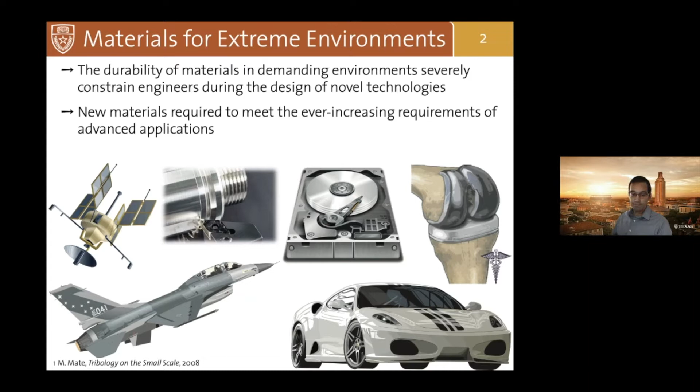If you think about other kinds of aerospace satellites, you see that it's not only the temperature that has to go from very low values to very high values, but also the extreme environmental conditions that these components are exposed to vary widely in space—for example, from ultra vacuum to oxidizing environments, as well as moving components.

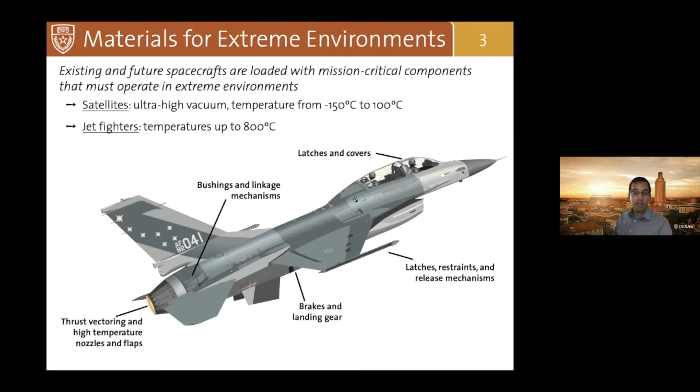A lot of the components highlighted here do have surfaces that are in relative motion, meaning they're sliding against each other. That's exactly one of the interests of my research group, which is tribology. For those of you who are not familiar with the word, tribology is the science and technology of interacting surfaces in relative motion and associated subjects, mainly friction, wear, and lubrication.

When two bodies come into contact at the macro scale, contact occurs at the level of single asperities. These asperities have the dimension of a few microns or even a few nanometers squared. The usual way I introduce this to my students is by thinking about putting Austria upside down on top of Switzerland—of course, you have mountains coming into contact because of surface roughness.

And it is exactly at the level of these single asperities that fundamental phenomena occur, including plasticity, elastic deformation, fracture events, and the conditions are so extreme in terms of temperature and out-of-equilibrium conditions that you can also trigger chemical reactions. In other words, tribological surfaces and interfaces involve a complex interaction between chemistry, physics, and mechanics. I will get back to the importance of studying these nanoscale features later on in my talk.

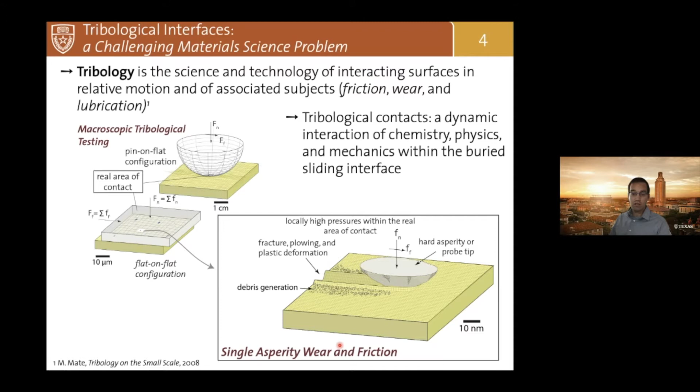Why do we care about tribology? Tribology has a profound impact on our economy, lifestyles, and environment.

More than 10% of the world's energy produced is wasted overcoming friction and replacing worn-out components. For example, the economic losses due to friction, wear, and replacement of worn-out components is around 4% of the gross domestic product, so $740 billion in the US.

To be even more concrete, around one-third of the fuel energy put into our cars is wasted just to allow your car to move. That means every one of you who owns a car is wasting something like $300 per year just to allow your car to move. So tribology has a direct economic impact overall, but also in our everyday life.

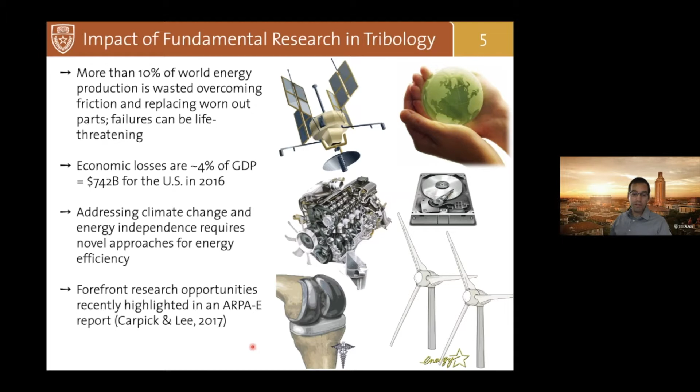But it's not only economic, it's also environmental, as well as, I'll touch upon later in this talk, healthcare. More recently, there was a report to ARPA-E by Carpick and Lee that highlighted the importance of fundamental and applied research in tribology to address this important global challenge.

Our approach, though, is not the traditional approach used in material science and tribology, where you have a systematic parametric study of the relationship between material synthesis and functional behavior. Rather, we want to establish synthesis-structure-properties-functional behavior relationships, meaning we want to establish the knowledge necessary for rationally designing materials.

We want to address that problem by using advanced surface analytical methods and in situ approaches to investigate in real time what happens when surfaces are in contact and sliding against each other.

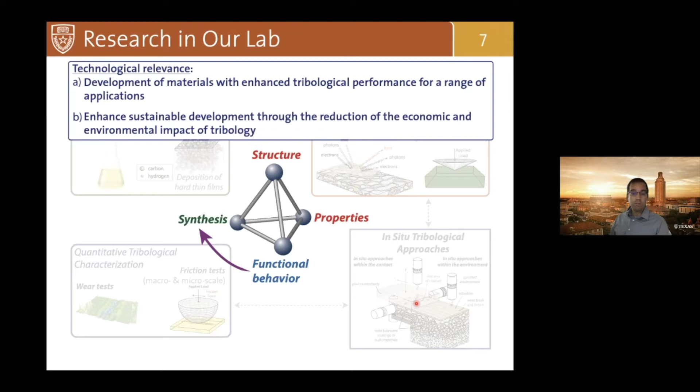This, of course, can lead to novel technology across different sectors and different length scales, from the micrometer, nanometer length scale to the meter length scale. I'll get back to this at the end of this talk.

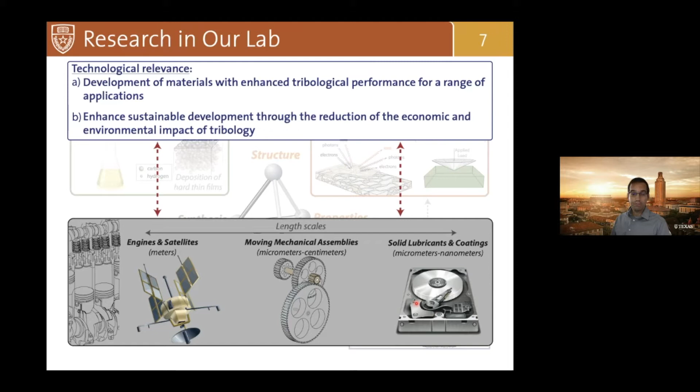The research projects we are working on in my lab can be divided into four main categories. The first one is liquid lubricants. I'm trying to understand the molecular origins responsible for the tribological response of lubricants that are used in engines, but also potentially in aerospace applications.

Thin films, again mainly for aerospace applications but also microelectronics, bulk materials, and finally a project on tribocorrosion for healthcare. Today I will mainly focus on liquid lubricants, but I'll also mention ongoing research on thin films and tribocorrosion. Let me start with the first topic.

As you might know, our engines, internal combustion engines, rely on a hydrocarbon fluid to enhance lubrication of moving components. This lubricating fluid consists of hydrocarbon base oil and an additive package.

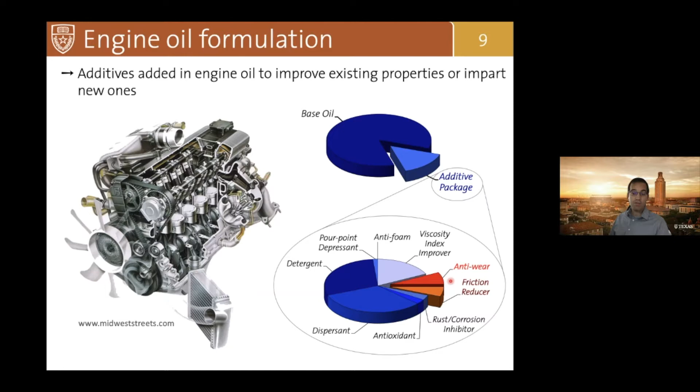The additive package consists of several molecules, each with a specific function. Among them, we are interested in investigating anti-wear and friction-reducing molecules that, as the name says, reduce friction, enhancing the energy efficiency of the internal combustion engine and preventing damage to components sliding against each other.

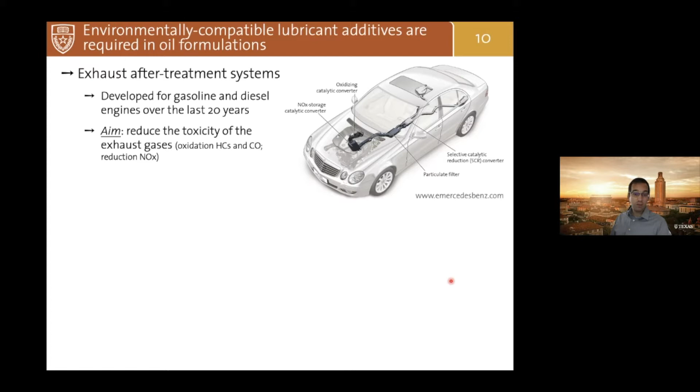What is the problem? In the last 20 years or so, exhaust after-treatment systems have been introduced to reduce the toxicity of exhaust gases. However, these catalysts are easily poisoned through deposits on the catalyst material by byproducts of components usually found in engine oils, in particular molecules containing high levels of phosphorus, sulfur, and metal ions.

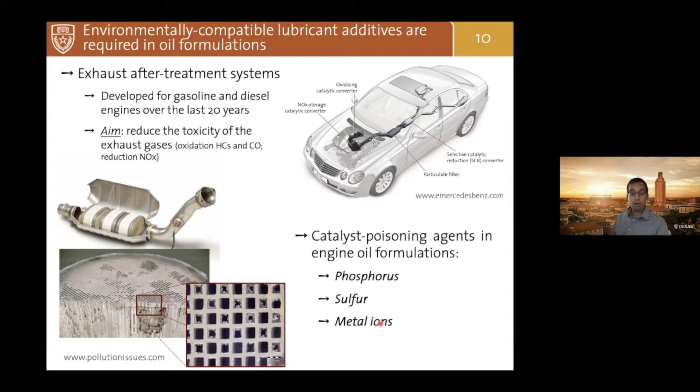Because of this problem, international legislations are trying to reduce the amount of phosphorus, sulfur, and metal ions in engine oils, and they are also pushing towards molecules that are highly thermally stable.

One of the potential additives that has been quite widely investigated recently is a family of liquids called ionic liquids. These are liquids or salts that have melting temperatures below 100 Celsius, composed of an organic cation and a weakly coordinating anion. They have unique properties such as high thermal stability, negligible vapor pressure.

and good ionic conductivity, which make them attractive for a number of applications, from green solvents to separation media, as well as working fluids, for example in lubrication.

They have been shown to lubricate even difficult to lubricate materials such as silicon and light alloys. They are, of course, a candidate material for engine oils, but also for aerospace applications, given the low vapor pressure.

One of the problems is that there are 10 to the 18 ionic liquids available due to the number of permutations between anions and cations. Of course, I can try to have 10 to the 18 graduate students, but probably that would not be the most efficient way to address this problem.

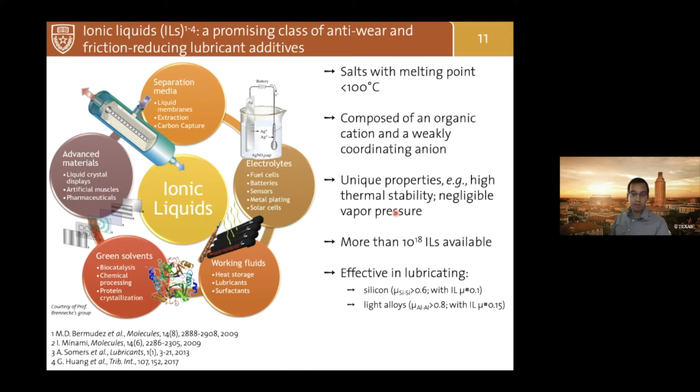So what we are trying to do is understand the underpinning mechanism by which ionic liquids can lubricate materials. So what is known? If you take a very rudimentary picture of what's happening when macroscopic bodies come into contact and slide, because of surface roughness, you have these asperities that come into contact. And this is exactly where a lot of the interesting things happen.

So what happens when you put this nanometer scale single asperity into contact in the presence of the ionic liquid? This is a very simple problem you might think about, but is actually very complicated and challenging to address. A lot of people use nanoscale devices, such as the surface force apparatus and the atomic force microscope, to squeeze the ionic liquid between the surfaces, trying to understand what happens between the ionic liquid when they are confined between these two solid surfaces.

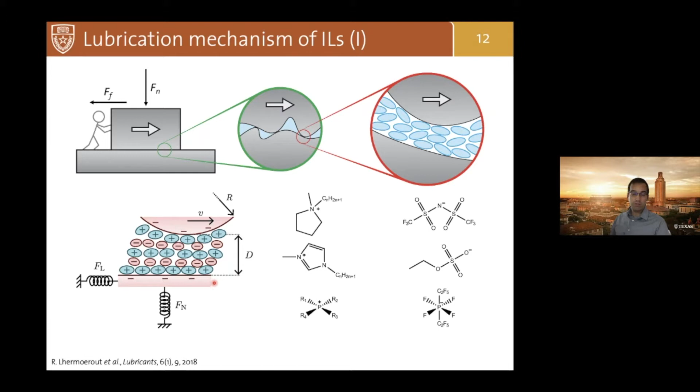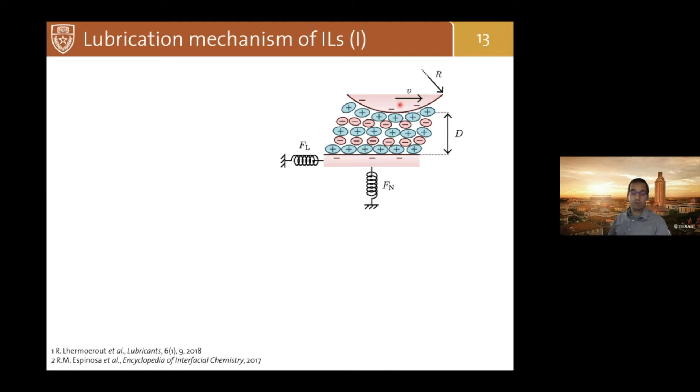So published literature shows that when you have velocity equal to 0, meaning that they are static, you're just compressing the two surfaces and confining the ionic liquid, you have what is called progressive squeezing out of the ionic liquid. Here you see the force experienced by the surface when they come into contact with the reference surface, the bottom one, as a function of separation d.

And what you see is exactly some fluctuations. These fluctuations, or discrete steps, correspond to the squeezing out of ionic liquid during the progressive decrease of the separation between the two surfaces. So in other words, the ionic liquid organizes itself in layers where you have an excess of cations and an excess of anions. And when you're decreasing the separation, you're progressively squeezing out slabs, electroneutral slabs, so you're removing anions and cations at the same time. And because of this squeezing out, you have these progressive, discrete steps in the force separation curve.

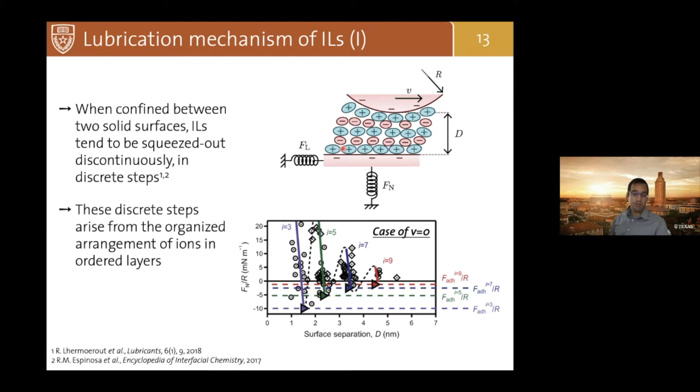Because of this squeezing out, or because of this rearrangement, people have basically proposed that this arrangement of the ionic liquid during the compression and confinement actually results in the lubricity of the ionic liquid.

However, at the macro scale, a group led by Jun Qu from Oak Ridge National Lab clearly showed a while ago that ionic liquids actually react on surfaces, so a completely different mechanism. They create these layers, which you see on top of this steel. At the bottom here you have steel, and then you have this tribofilm boundary film.

And what researchers from Oak Ridge showed is that in the case of this phosphonium phosphate ionic liquid, you have the formation of this phosphate-rich layer that actually prevents wear and leads to low friction in macro scale tribological experiments. So clearly here we have a length scale problem. So at the nanoscale we have some information, and at the macro scale we have some other mechanism coming into play.

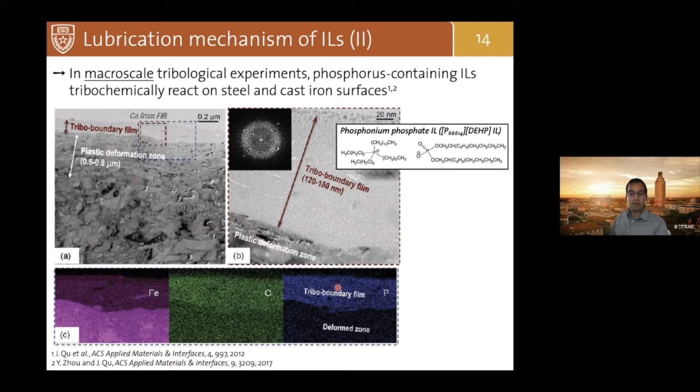So that's exactly what we wanted to do to start with in my lab. What happens really when you're applying very high pressure at the nanoscale with the phosphonium phosphate ionic liquid? What is the underpinning lubrication mechanism of ionic liquid, and can we understand at the nanoscale what happens to the ionic liquid itself when it is squeezed at very high pressure?

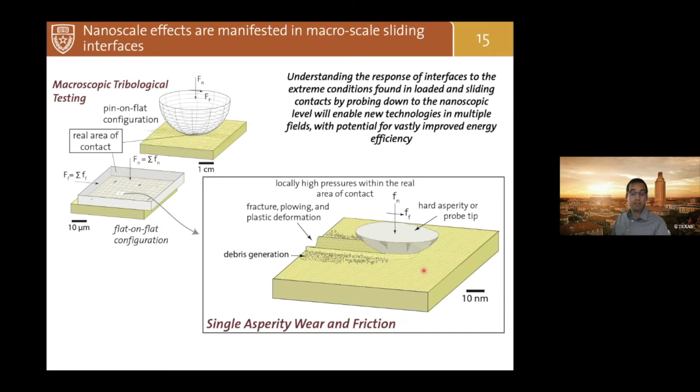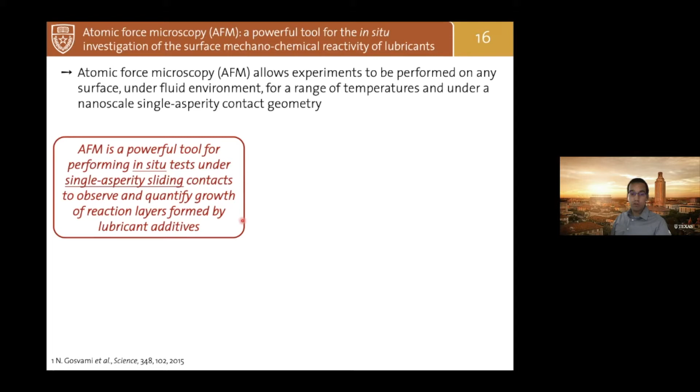How do we do it? We use, as I said, in my group, state-of-the-art analytical methods, and in particular, in this case, atomic force microscopy. Why? Because atomic force microscopy allows us to perform in situ tests in single asperity sliding contacts.

For those of you who are not familiar with AFM, AFM uses a flexible cantilever, at the end of which you have a very sharp tip, that are pushed together, and you can achieve extremely high load and pressure in the presence of the ionic liquid.

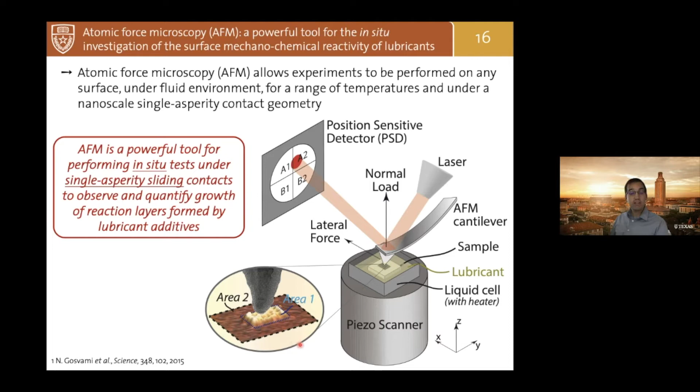This would allow us to show, understand, and visualize what happens at the contact in real time, while knowing basically the shape of the tip, meaning the pressure, to have an accurate measurement of the pressure.

The test that I'm going to talk about, again in the case of phosphonium phosphate ionic liquid, which is a well-known ionic liquid pioneered by researchers at Oak Ridge, we basically perform high pressure, very high pressure, the highest we can go with AFM, in this dark red region. And every now and then we zoom out and we visualize what happens in this small area down here.

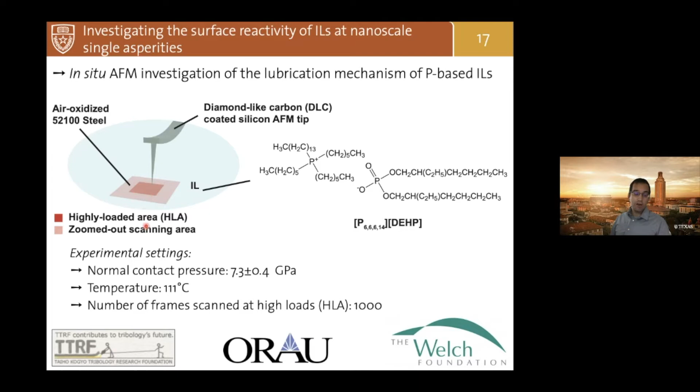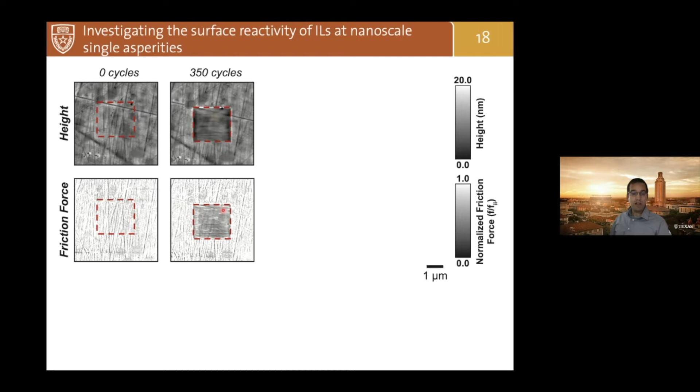What you see is an area slightly darker, meaning slightly lower height—in other words, we are removing material. At the same time, we see a darker region in the friction force, meaning we are decreasing the friction force measured by AFM.

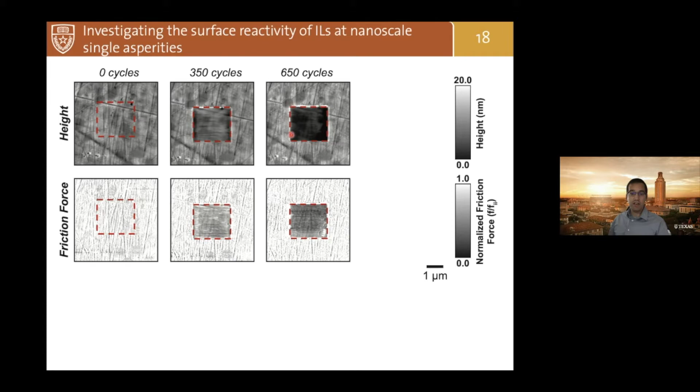We can increase the cycles in the inner part of this image where we apply very high load, performing 650 cycles inside this dashed red area. Again, we are removing more and more material. So there is a progressive removal of material, and at the same time a decrease in friction.

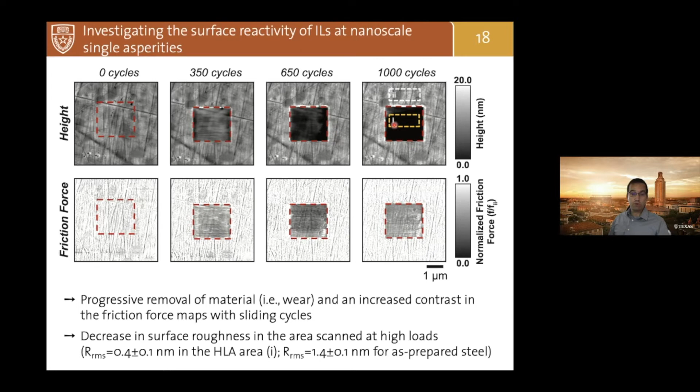The area scanned at high load was actually getting much smoother, as measured by RMS roughness. So we tried to quantify this by computing the height difference between the area scanned at high loads and the reference area that was not scanned at high load.

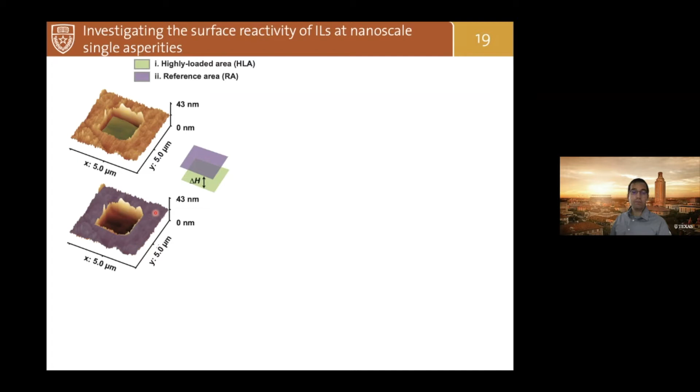We also computed the change in friction by looking at the friction force distribution and computing the difference between the distribution in the region loaded at maximum load and the reference area.

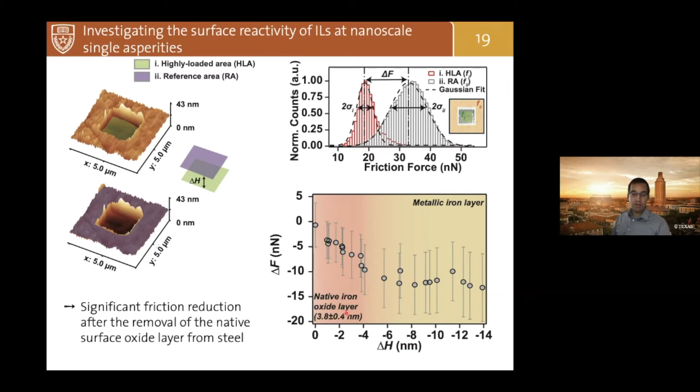The key result is in this plot at the bottom right, where you see the change in friction as a function of change in height. There is a slight progressive decrease in friction until you remove the first 4 nanometers of the surface. This value was comparable to the native oxide layer on steel, meaning that once we go through the steel oxide, we achieve a low friction steady state regime.

So what is the origin of this? As a surface chemist, I'm always interested in spectra, and in understanding the underlying surface chemical origin of friction changes.

To address this problem, we have to use a national facility, the National Synchrotron Light Source. It's basically taking a sample that is 1 square centimeter and finding a spot on the order of 10 to the minus 8 centimeters squared.

My student very patiently traveled thousands of miles and was able to see a 2 by 2 micron region over a 1 centimeter square sample in a very effective way, in just a few days at the synchrotron.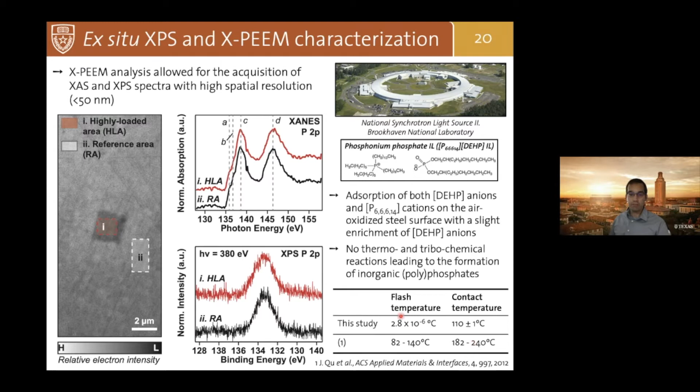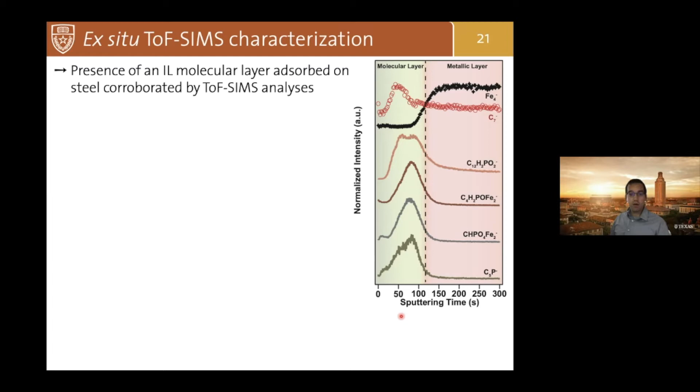Being surface analysis people, we were also interested to look at the molecular fragments in these boundary layers. What we show is that in the region under stress at very high loads, we have an enrichment of the anion, the phosphate, while we don't have an enrichment of the cations, or a small enrichment probably.

All these changes were also correlated to changes in surface potential that we measure by low energy electron microscopy. This technique measures the surface potential by looking at the intensity of reflected electrons as a function of electron energy. The inflection point is a clear indication of where the surface potential of our sample is.

We could put all this together thanks to density functional theory calculations, which were done by looking at the adsorption of phosphate ions on iron, metallic iron and iron oxide. Of course, there is a change in enthalpy of adsorption, but the key point is that phosphate on metallic iron interacts through multi-point interaction of oxygen atoms with iron, whereas phosphate only binds through a monodentate interaction, meaning only through one oxygen atom, on iron oxide.

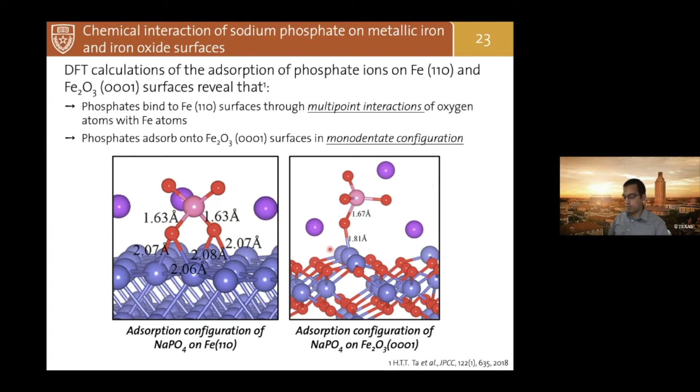Based on our results and the DFT calculations reported in the literature, we came up with these proposed models where we have mainly phosphate adsorption on iron oxide. As the scanning tip slides at high pressure, we start organizing the ions through lateral confinement, something I'm not going to talk about today.

If we slide at extremely high loads, we go through the oxide, which results in a difference in the way the phosphate ions bind to the surface. In the case of iron oxide, you have only monodentate configuration, whereas in the case of metallic iron, you have bidentate configuration. Thanks to the surface being extremely smooth and the lateral confinement of the AFM tip, the ions maximize the interaction energy, reduce the configurational entropy, and form this densely packed boundary layer that is helpful in reducing friction.

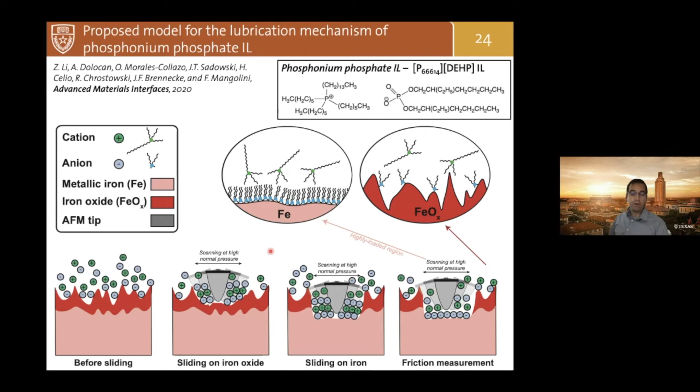So again, in this work, we show how you can combine in situ AFM and advanced spectroscopy to understand the mechanism of action of ionic liquids and how they can lubricate surfaces.

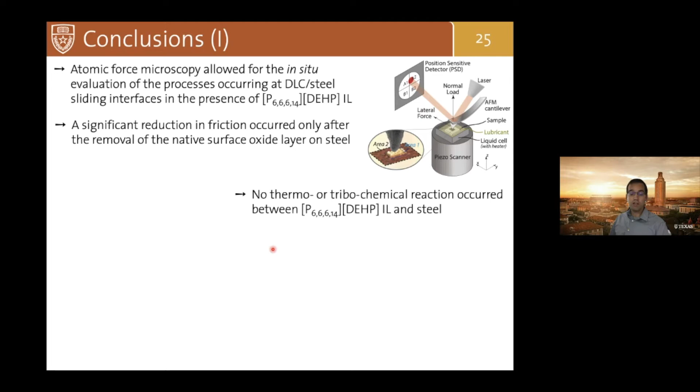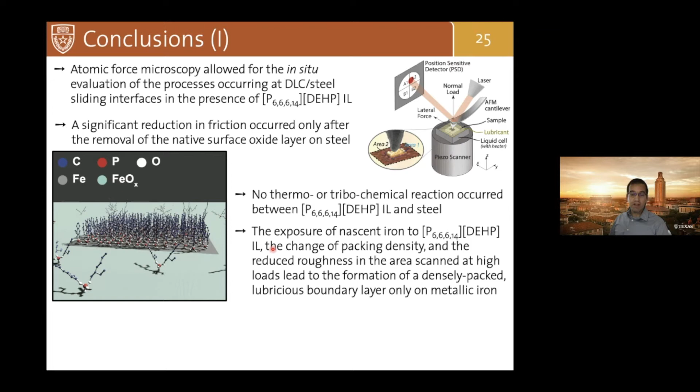Again, atomic force microscopy can be used to evaluate the processes occurring at steel surfaces. I showed that there is a significant reduction in friction after you remove the steel oxide layer. There is no stress-assisted chemical reaction, so there is no real inorganic boundary layer formed here. But we have the formation of a densely packed surface layer made mainly of phosphate ions once you remove the oxide layer.

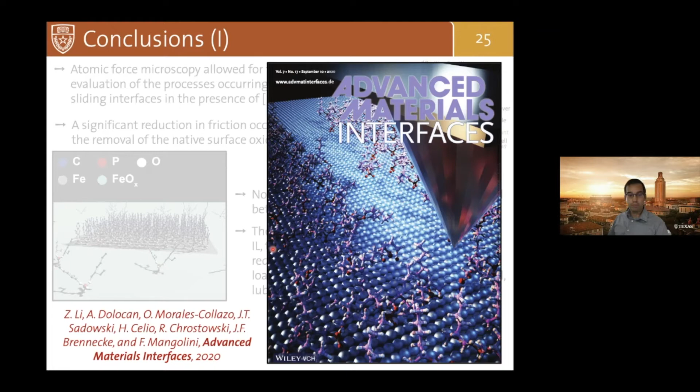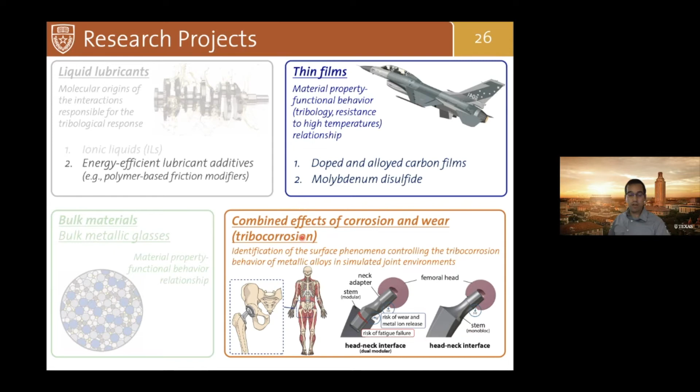So very briefly, in the last 5 to 10 minutes, I'm going to touch upon a couple of projects. One is about doped carbon materials, and the second one about tribocorrosion. This work was a collaborative effort between University of Pennsylvania, École Centrale de Lyon, University of North Texas, and University of Florida, with a contribution from NASA.

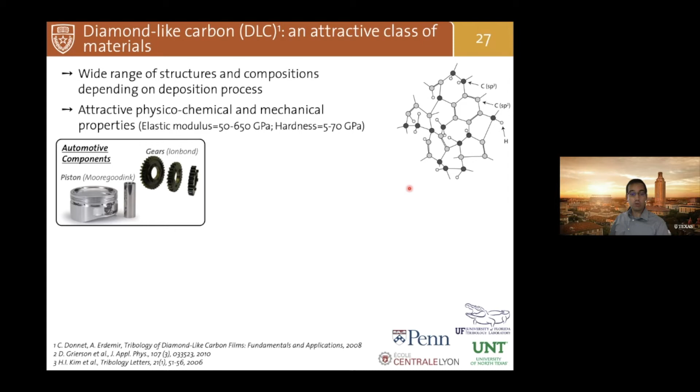For those not familiar with the term diamond-like carbon: it is a very well established class of thin film materials whose success derives from their attractive physical, chemical, and mechanical properties. They consist of an amorphous network of carbon atoms, and because of these properties, they have been used as coatings for automotive components, machining tools, aerospace applications, as well as biomaterials, including total hip replacements.

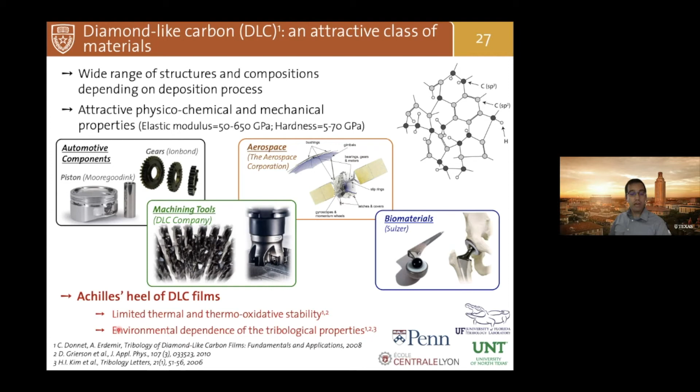However, there are two major limitations that currently hinder their use in a wider range of applications. The first is the limited thermal and thermo-oxidative stability, and the second is the environmental dependence of friction and wear. We have done extensive work also on the second topic, but today I'm only going to focus on the first topic.

As in the semiconductor industry, if you introduce new elements, you can actually tune and tailor the properties of diamond-like carbon materials. A lot of work has been done on this in the last 20 years.

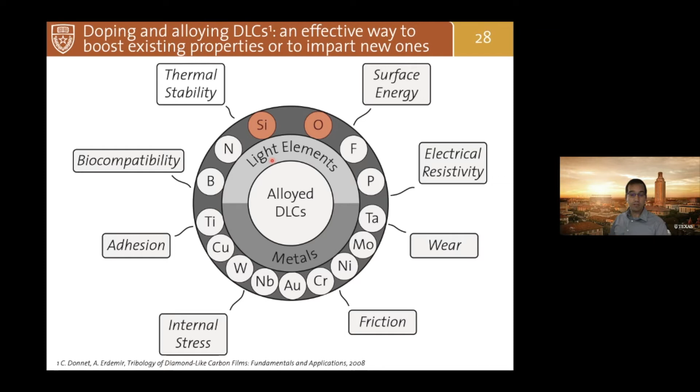Today I'm going to focus on the effect of silicon and oxygen, because silicon and oxygen have been shown to increase the thermal stability, but the origin behind it was not established. That's why we started looking at this DLC that includes silicon and oxygen atoms.

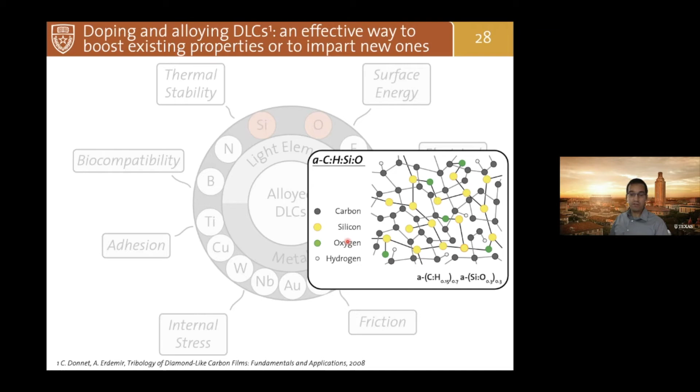We call it amorphous carbon, hydrogenated carbon with silicon and oxygen. We've done extensive work in the last five years looking at these. We coupled advanced characterization methods that synchrotron facilities provide, including NEXAFS spectroscopy, X-ray absorption spectroscopy, and molecular dynamics, trying to understand the origin behind the higher thermal stability of this material compared to the material without silicon and oxygen.

Here you see the fraction of carbon in sp2 configuration as a function of temperature. These are MD simulations. What you can see is that the material without silicon and oxygen, in gray, undergoes much more transformation, or increase in sp2 fraction.

When you increase the sp2 fraction, you have a transition of sp3 to sp2. You usually lose a lot of the mechanical properties of this material, so you want to keep the sp3 fraction as constant as possible.

These results are confirmed also by experimental results showing that the introduction of silicon and oxygen renders the material more thermally stable. By molecular dynamics simulation, we could identify the origin: the material that contains silicon and oxygen has a lower fraction of strained carbon-carbon bonds, which are the first ones that want to break.

As we can easily understand and visualize, if you have a bond which is strained, if you increase the temperature, the higher the strain of the bond, the easier it is to break that bond.

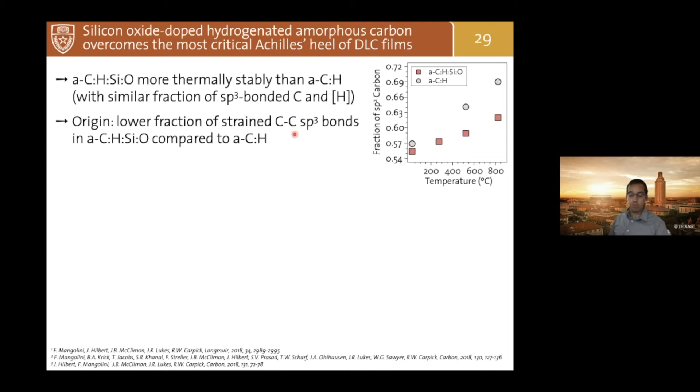We were also very fortunate to participate in the Materials on International Space Station experiment between 2008 and 2009. This material was sent aboard the International Space Station for a year and a half, where it was exposed to thermal cycling, vacuum, and ultraviolet radiation, as well as, most importantly, atomic oxygen. Atomic oxygen is a great issue for materials on satellites because of its high energy as well as its high flux.

What we could prove upon retrieval of the sample on Earth is that this material actually has a self-healing, self-protecting behavior, meaning that the addition of silicon and oxygen prevents the material from being completely burned away.

If you take the same kind of material without silicon and oxygen into space, it is quickly gone in a few seconds, because atomic oxygen basically burns away the carbon in these DLC coatings.

If you introduce silicon and oxygen — and these were really nice images taken by Tom Scharf at UNT — you have the formation of this 5 nanometer silica-rich layer, which acts as an oxygen diffusion barrier and prevents the carbon underneath from reacting with atomic oxygen and being completely burned away as carbon dioxide.

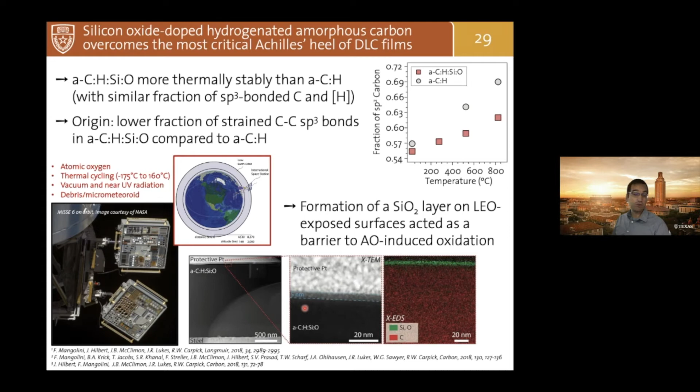So in the last 2 to 5 minutes, I'm going to talk about the last project that we are actually working on right now in my lab.

As you know, arthritis is a big issue with a profound economic as well as lifestyle impact on our population. The usual way of solving arthritis problems is using total hip replacement.

Of course, if you look at the market, there are different solutions for total hip replacement. However, the average lifespan for state-of-the-art total hip replacement is only 15 years. This is not a problem for some of the population that is a little bit older, but it can create really severe problems for younger patients who have to undergo maybe a second surgery later in their life.

The failure mechanism that limits the lifespan of these replacements actually derives from failure of these multi-components due to the coupling between sliding or mechanical micromotion and corrosion. That's what is called tribocorrosion.

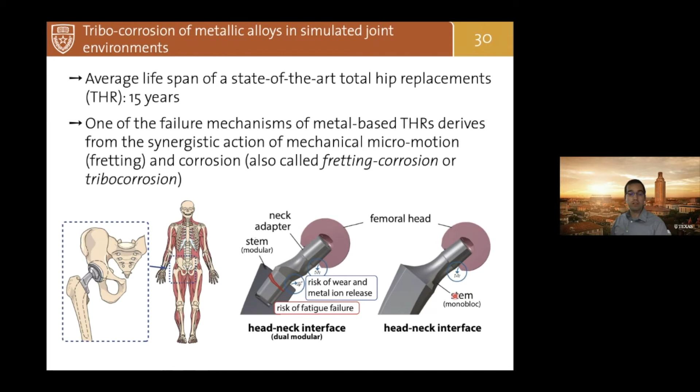So of course it is an environment, there's a fluid, and you have also micro motion, and the coupling creates very much a lot of problem in terms of basically release of metal ions that can cause inflammation and pain in patient. So what we want to do first is understand what happens at this interface, and by understanding, try to guide the design of new materials that can prevent metal ion release and inflammation in the patient, to improve the longevity of these replacements.

So these are preliminary results that we have. We look at state-of-the-art material, cobalt, chromium, molybdenum, and in this set of experiments we look at how this material repassivates in the presence of an environment that does or does not contain bovine serum, or the albumin that is present in our synovial fluid.

So we coupled electrochemical experiments and measurements with sliding experiments. We could correlate friction with the electrochemical potential, and we also carried out impedance spectroscopy measurements. What we observed is that the kinetics of the repassivation of cobalt, chromium, molybdenum was very fast only in the buffer solution without any albumin.

Whereas if you have albumin, if you have proteins in the buffer solution, the repassivation kinetics is much slower, and also the passive film was much more porous. This is an important problem to look at since it will also impact the mechanical properties of the passive layer and the potential wear resistance of the passive layer over time.

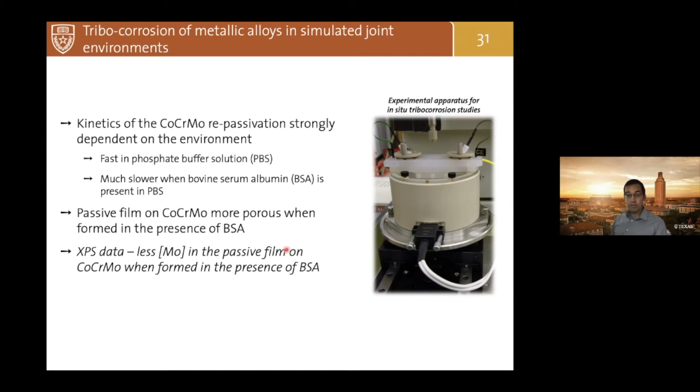So with this, I would like to conclude. These are my final take-home messages.

So today I showed you how we use atomic force microscopy and macro-scale experiments together with surface analysis and advanced surface characterization methods to understand the relationship between material synthesis, structure, properties, and functional behavior.

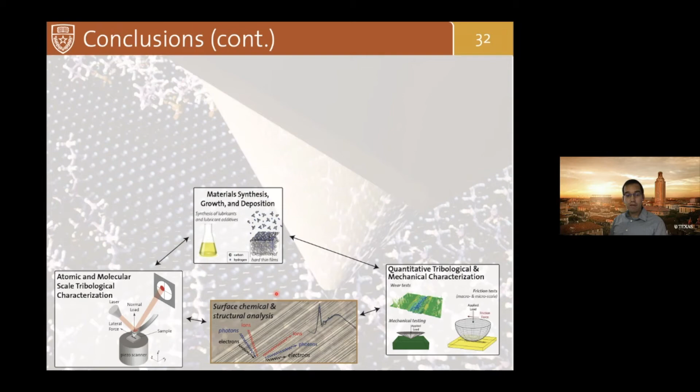So even though our research is at low TRL levels, meaning we are addressing basic research questions, the outcomes can really lead to guidelines for designing materials and solutions for addressing applied problems across different length scales and sectors—from the micrometer and nanometer length scale, for example in hard disk drives, to the meter length scale, such as in satellites or even in our automotive engines.

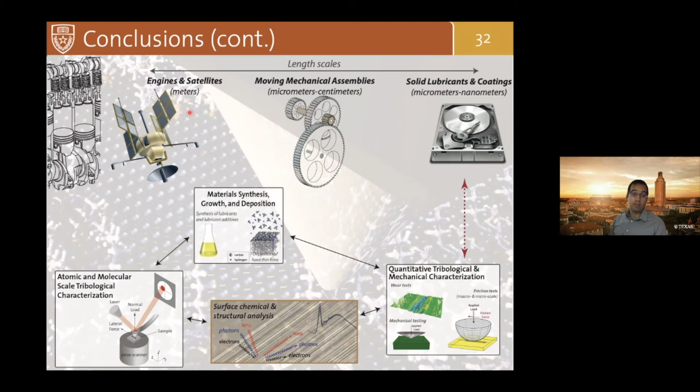So with this, I would like to conclude here.